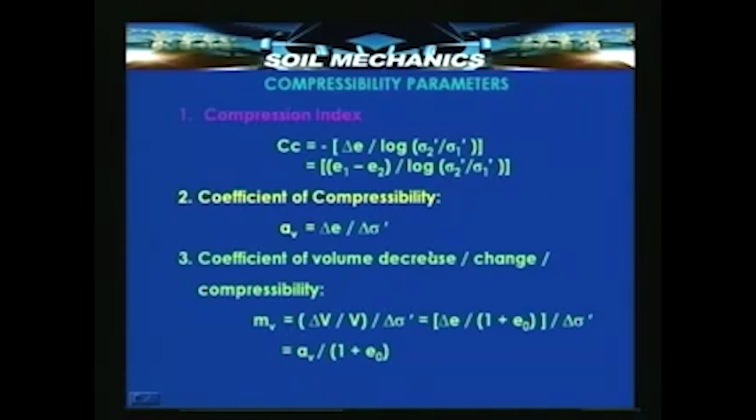What is important to notice, however, is that C c is a non-dimensional parameter and it is dependent upon void ratio change and the logarithm of the stress change, whereas a v, coefficient of compressibility, depends upon the volumetric change or the void ratio change and the stress change, effective stress in particular. And m v is nothing but a v upon the constant volume of the solids.

We know that if the total volume is 1 plus e 0, the volume of solids is 1 upon 1 plus e 0 at any point of time, where e 0 is the initial void ratio, and therefore, a v upon 1 plus e 0 is a parameter that represents compressibility in terms of the original volume of the solids, which is invariant, and therefore, it serves as a convenient denominator for comparison of different clays or different soils with different a v's or different degrees of compressibility.

Let us take a quick look at the analogy, since we are going into the mathematical representation of this analogy. We defined a cylinder with a piston and a spring with an outlet for water, and we saw that the cylinder represented the soil, the spring represented the soil skeleton, water represented the pore fluid, and the piston with its opening represented the pores, and the valve represented the degree of opening of the voids or the permeability of the soil.

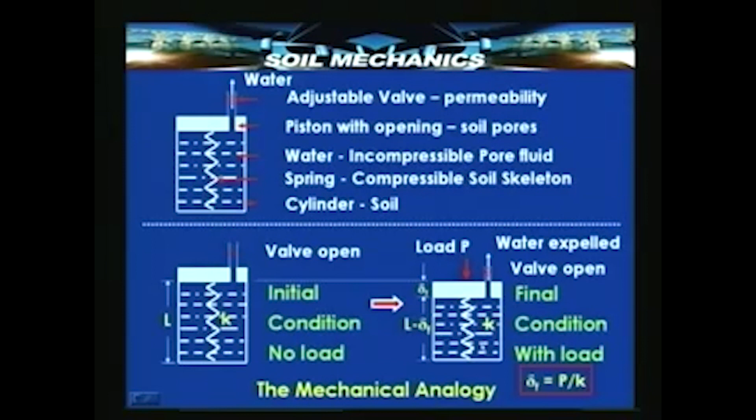Initially the soil is at rest, so there is no excess hydrostatic pressure because there is no load. The moment you apply a load at t equal to 0, the water takes the load and gradually passes it on to the solids. Ultimately, at t equal to infinity, water would have escaped to such an extent as to bring back hydrostatic equilibrium, and the spring would have compressed by an amount delta final, equal to the applied load P divided by the spring constant K.

If we take the consolidation part alone, as soon as we apply load at t equal to 0, there is no deformation of the spring. The load carried by the water is the complete load P, and the load carried by the solids is 0. But at the end of consolidation, the situation is different: the load carried by water is P minus the load carried by the spring. At t equal to infinity, K delta F becomes equal to P, so water carries no load, whereas the solids carry the entire load P.

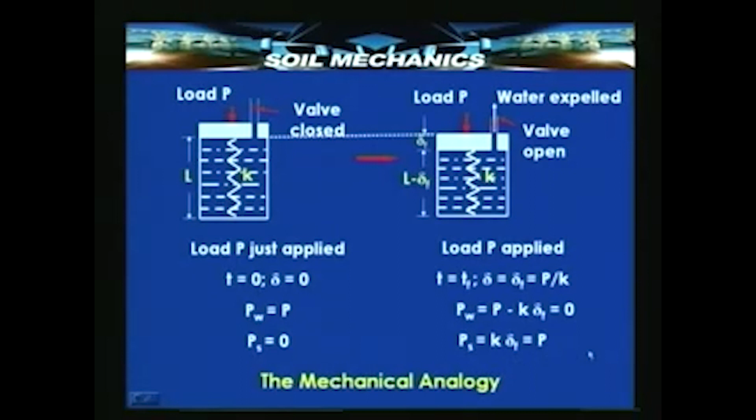Now let us see the real situation. If we apply a surcharge Q, there is an initial pore pressure U equal to Q. When you just apply the load at t equal to 0, U equals Q and sigma dash equals 0. At the end of the consolidation phenomenon, the pore pressure is U final and sigma dash is sigma F final. If we proceed further, the pore pressure gradually gets dissipated and U becomes 0, with the entire sigma dash carried by the solids in the form of Q.

This U, the so-called excess hydrostatic pressure, is a function of depth and time. This is the variation of U at any point of time. It is worth mentioning that it is 0 at the top permeable layer and also 0 at the bottom permeable layer.

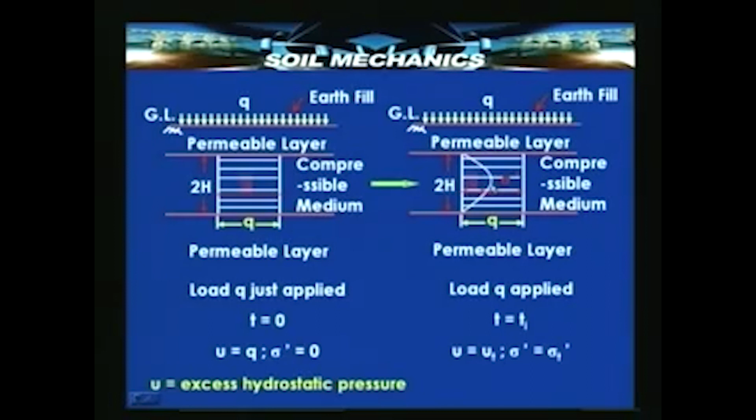Going back one slide: at t equal to 0, as soon as we apply the load, the entire applied pressure Q is carried by the water, so water takes up a pore pressure U, an excess hydrostatic pressure above hydrostatic, equal to U throughout its depth. But since the upper layer is permeable and the lower layer is also permeable, at these two points inside the clay layer the pressure is U, whereas just outside, because it is a draining layer, the pressure is 0. That means there is an infinite hydraulic gradient, so instantly the pore pressure U gets dissipated completely, and as shown in this diagram, the pore pressure is 0 at the two ends and maximum at the center, and this goes on.

The ends keep constantly having a pressure U equal to 0, whereas at the center the pore pressure is maximum, but its value keeps changing with time. Ultimately, it decreases to such an extent as to transfer the entire load to the solids in the form of sigma dash. Now let us take a look at the mathematical formulation quickly, to the extent we had introduced it last time.

We defined a number of parameters. One is Av. Av is nothing but minus dE by dP, that is, the rate of change of void ratio with pressure, how the void ratio changes as pressure is increased. Since the void ratio decreases with increase in pressure, Av is minus dE by dP.

We also defined a parameter called the degree of consolidation corresponding to any depth, in terms of E, usually expressed as a percent. This is denoted as Uz, the degree of consolidation at any depth z. It equals, at any given point of time, the initial void ratio minus the void ratio at that depth at that time, divided by the total change in void ratio.

This void ratio has to be related to pressure, and through the pressure it has to be related to the excess hydrostatic pressure, and then we can relate that to the rate at which water flows out, so that we can get the value of degree of consolidation at any point of time.

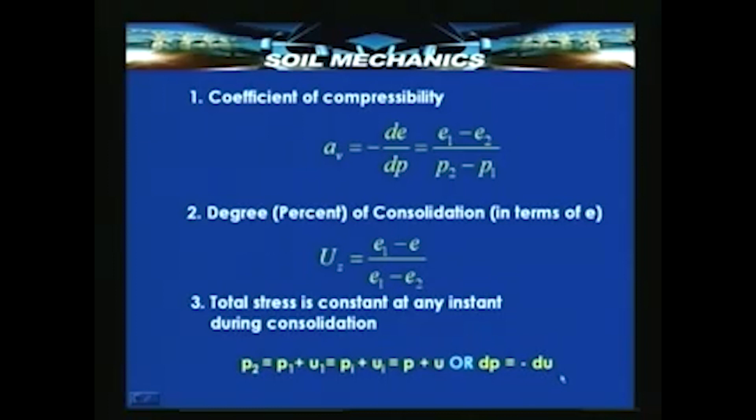So this gives us a way to express this degree of consolidation through E1 minus E, and P minus P1, and finally Ui minus U. Finally we get the degree of consolidation as 1 minus U upon Ui, where Ui is the initial excess hydrostatic pressure, and we know that the initial excess hydrostatic pressure is nothing but the external stress applied, that is, in our case, Q.

So now, if we sum up all this, we say that dE is equal to minus AV dP, and it is also equal to AV dU. So here we have the indication as to how to link the change in hydrostatic pressure, excess pressure, through the change in stress to the degree of consolidation or change in void ratio.

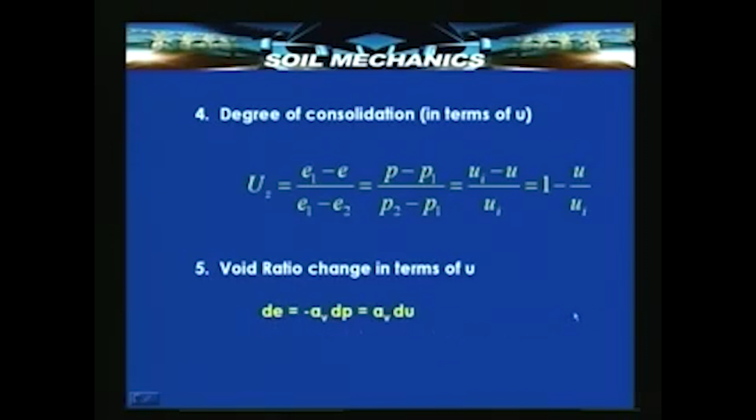For this purpose we made a series of assumptions. All the assumptions are here: homogeneous, saturated, incompressible, one dimensional compression is valid, Darcy's law is valid, and the e-p idealized linear relationship is valid.

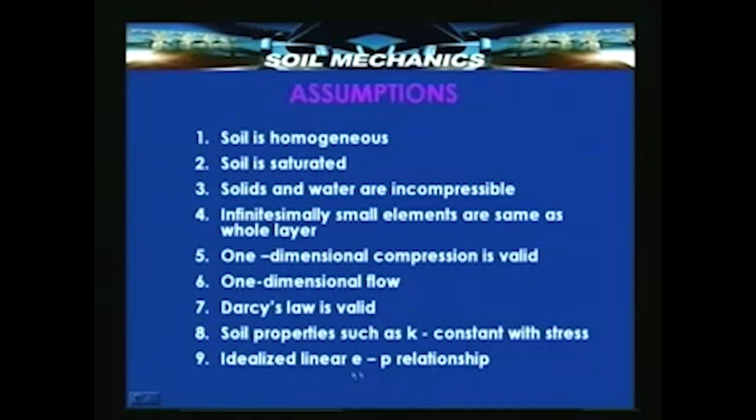So, for the purposes of mathematical formulation, we will consider a typical compressible layer with two permeable layers on either side. This is known as a double drainage system. The importance of this double drainage system will become evident after we finish the formulation of this problem in mathematical terms for two dimensional, or rather two directional, you can say double drainage system.

This earth fill is nothing but the external load applied.

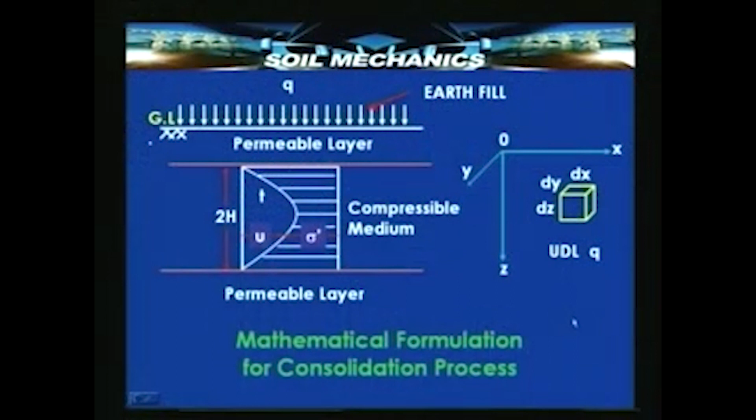We also saw last time that at the end of our mathematical analysis, we are going to have the degree of consolidation as a function of the depth and the time. For convenience, the degree of consolidation is expressed as a function of a non-dimensional depth and a non-dimensional time. The non-dimensional depth is the actual absolute depth divided by half the thickness of the layer, and the non-dimensional time is nothing but CVT by h square.

I have still not defined what is CV, and therefore at a later date we will again come back to this definition. These lines here, which show the variation of Uz with depth and time, are all similar in pattern, but as time increases you can see here that the degree of consolidation is going on increasing, or the pore pressure is going on decreasing. These are therefore nothing but lines of equal time with depth, and these are known as isochrones.

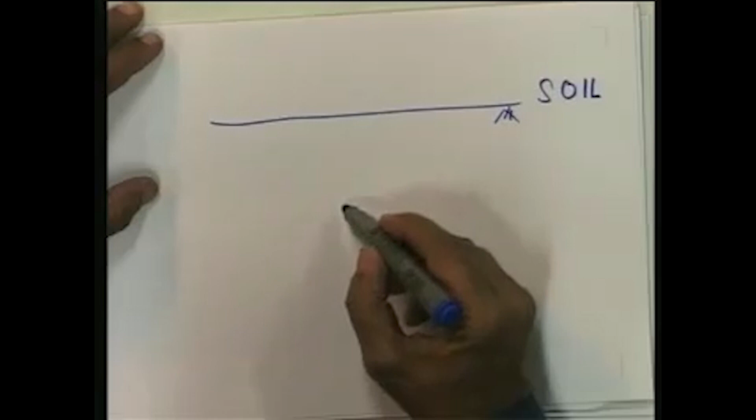Let us take a look at this slide, which shows a typical element in a homogeneous soil medium. Let me sketch it for convenience. We know we are dealing with a soil medium, and we will consider a typical element in it. Since we have assumed homogeneity, analyzing one element is as good as understanding the phenomenon over the entire medium.

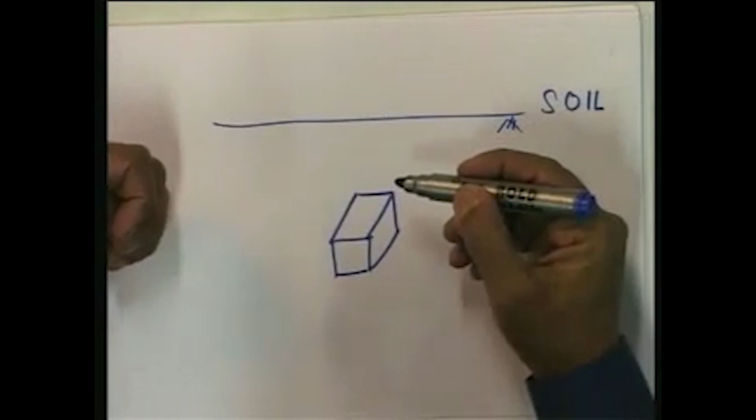Now, what is the phenomenon we are going to understand? We are interested in knowing how water is flowing out of this element. Let us use the knowledge we have of flow through this element. Suppose a certain amount of water is flowing into this element and coming out. The element is saturated.

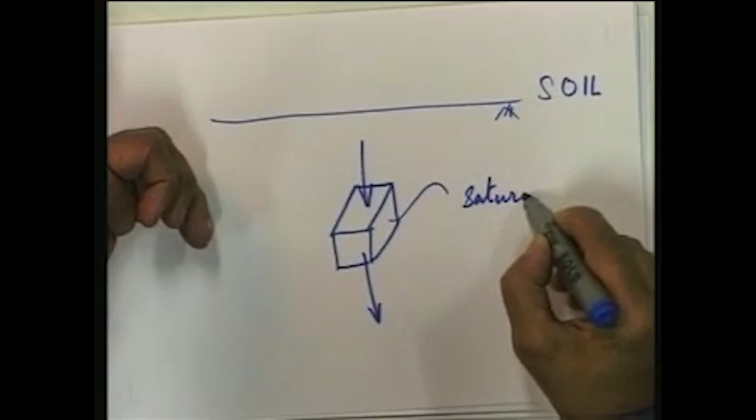Suppose this element is totally incompressible, then whatever water flows inside will also come outside. Every drop of water entering this saturated element will push out a corresponding drop, and therefore whatever flows in will also come out.

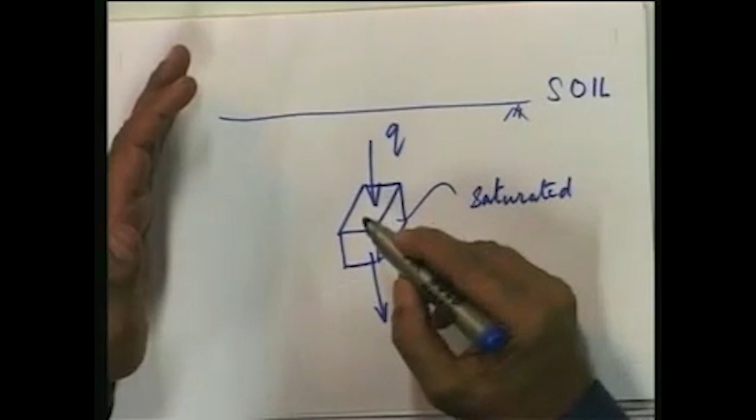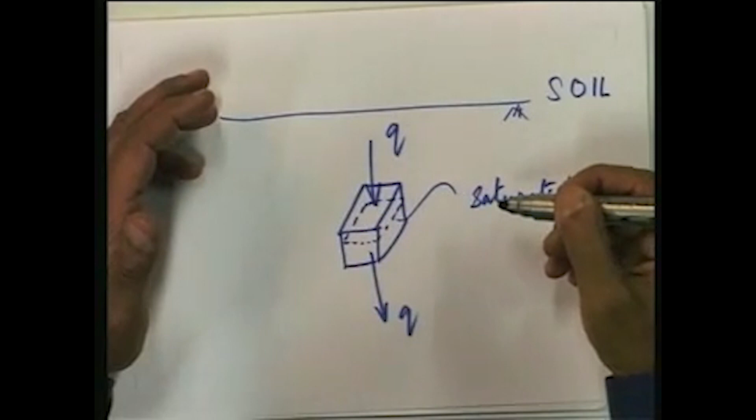But now we have a system where the soil is saturated, but as the water flows out, the soil compresses. The element compresses, which means its volume decreases. As Q goes out, there is a small reduction in the volume of water, and therefore there is a difference in the quantity of flow between outflow and inflow. In the problem of consolidation, it is this net outflow that we are interested in.

We can obtain this by simple basic considerations. Suppose there is an inflow represented as Vz, where Vz is the velocity. Velocity is nothing but flow per unit time, and considering unit area, Vz is flow per unit area per unit time. If the area is of finite dimensions delta x delta y, as shown here, with x, y, z axes also shown...

Then the inflow and outflow will be different in this medium. Let us represent the inflow as Vz, that is flow per unit area per unit time, and the outflow as Vz plus an incremental flow, that is the rate of change of flow multiplied by the depth over which the flow takes place: Vz plus del Vz by del z into delta z.

However, we know that this rate of outflow of the element is going to be equivalent to the rate of compression that ultimately takes place. So let us see what this rate of outflow is, so that we can express it in terms of this volume and relate it to the volumetric changes.

The net outflow from the element per unit time would obviously be this minus this. So del Vz by del z into delta z gives us the net outflow per unit time per unit area. If I multiply this by the area delta x delta y, I get the outflow over the whole element, but still per unit time, and this is nothing but the rate of outflow from the element.

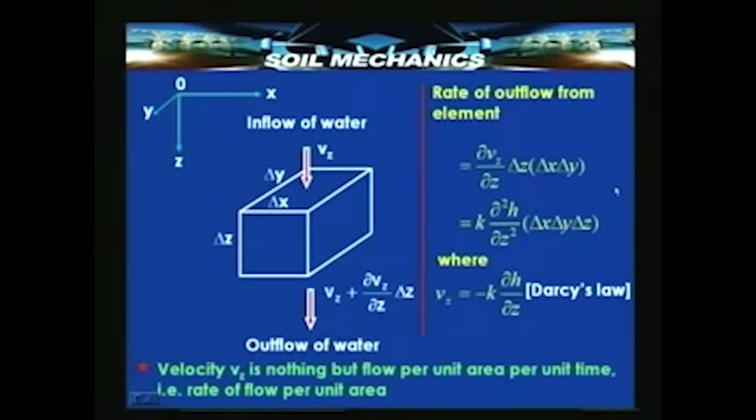Now, what this means is we can represent ultimately the rate of outflow in terms of the permeability of the soil, in terms of the rate of change of hydraulic gradient, and in terms of the volume. It is a very interesting equation which completely captures the physical phenomenon that in the soil the rate of outflow of water is related very closely to the coefficient of permeability, and that is what is causing the entire phenomenon of consolidation in clays. Then we know that flow of water depends upon the rate of change of gradient, and that is also captured here, and the quantity of flow obviously depends upon the volume of the element, and therefore, that is also entering into this equation. Now, this rate of outflow must be equal to the rate at which compression takes place.

Let us see. At any instant during the consolidation phenomenon, if the void ratio happens to be E, then the volume of the voids in the soil would be E upon 1 plus E, because volume of the solid skeleton remains constant and 1 plus E is the total volume, and therefore, volume of the voids is E upon 1 plus E. And if I take the entire soil element of dimensions delta x, delta y, delta z, then the volume of voids in the element at any point of time to begin with will be E upon 1 plus E times delta x, delta y, delta z.

Now, as the flow takes place from inside the element to outside, this volume decreases. So, the volumetric change in unit time, that is the rate of change of volume, which is nothing but the rate at which the compression takes place, is going to be the derivative of this volume of voids with respect to time, and that is what is the rate of change of voids.

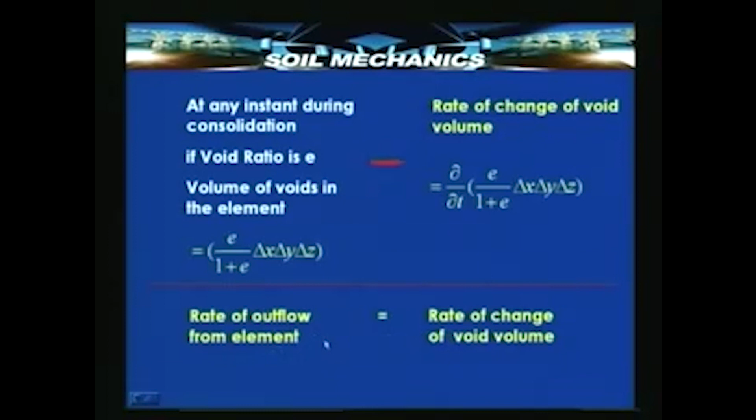Since this must be equal to the rate at which outflow is taking place, let us equate this, and we then have k del 2 h by del z square into delta x delta y delta z is equal to all this, which means that if we cancel out the volume of the element, which obviously is not 0, because we are dealing with a finite size dimension of the element, the volume of the element is not 0. If the volume of the element were 0, there would have been no problem to discuss at all. Therefore, in this case, this can be cancelled out, and we will have k del 2 h by del z square is del by del t of E upon 1 plus E.

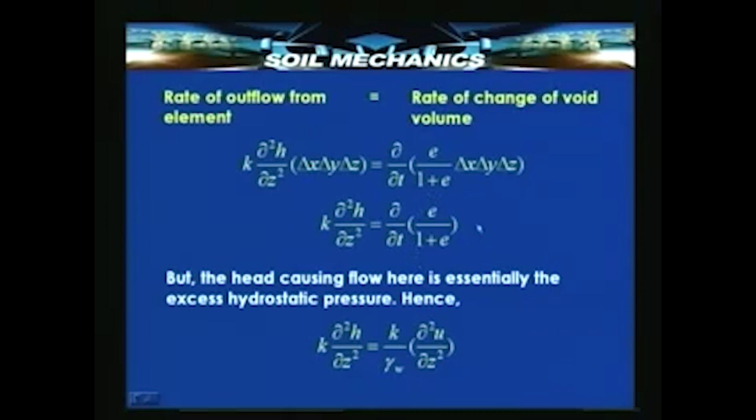Now, this h, which is the head causing flow, is nothing but u upon gamma w, where u is the excess hydrostatic pressure. So, this del 2 h by del z square can be written in terms of u upon gamma w, and so we will have k upon gamma w del 2 u by del z square, where u now is the excess hydrostatic pressure. This must now be equal to del by del t of E upon 1 plus E. So, let us equate them.

If you equate this is what you get, but before equating, let us see what this del by del t of E upon 1 plus E is. We have just now stated that 1 upon 1 plus E is the unchanging constant volume of the solids. So, volume of the solids is 1 upon 1 plus E, which remains constant, and therefore, del by del t of E upon 1 plus E is nothing but 1 upon 1 plus E of del E by del t. This being constant can be taken out.

And we have already seen that d E is related to d u, and from the previous equation, we can equate this change in void ratio with k delta 2 u by delta z square.

That is, if we equate the rate of flow with the rate of void compression and transfer the terms containing u to the two sides of the equation, then this is what we get. In this, k, a, v are all soil parameters, constants, and so this whole left hand side can be written as C v del 2 u by del z square equal to the right hand side, which is del u by del t.

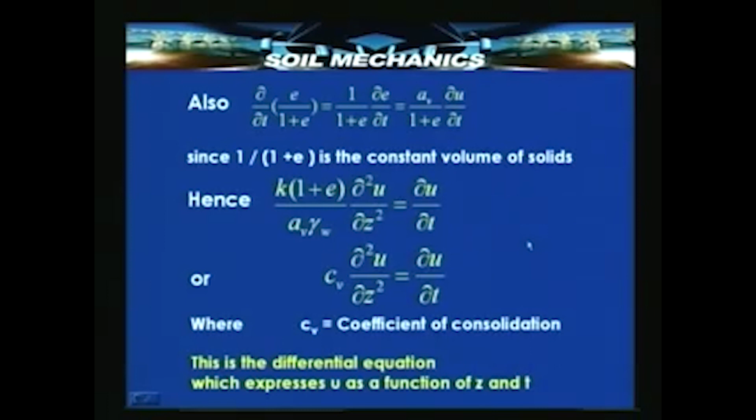We have now defined a new parameter Cv, the coefficient of consolidation. This gives us the differential equation which expresses u as a function of z and t. This is what we were after, since we wanted to know the rate of change of u with time so we could predict the compression corresponding to any time t. This coefficient of consolidation is yet another parameter, making the total number of compressibility parameters we have defined so far equal to 4.

Let us take a quick look at these 4 parameters. The first is minus dE by d log P. It has no units, because void ratio has no units, and log of the ratio of pressures also has no unit. Av, which is a linear relationship between E and P, will have units of inverse of stress, since E has no unit and 1 upon dP will have units of inverse stress, that is centimeter square per kg or meter square by kilonewton.

Another parameter we had defined was Av divided by the total volume 1 plus E, or in other words Av multiplied by the constant volume of the solids. This obviously will have the same units as Av, that is meter square per kN, because 1 plus E has no units.

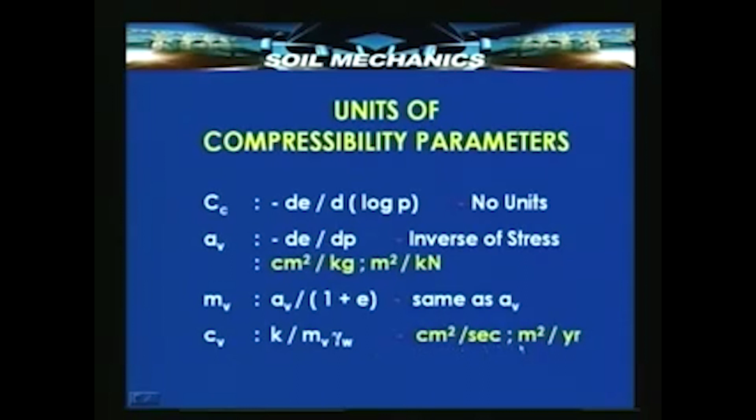Now the last parameter Cv, which we have just defined, is K upon mv gamma w. Since K has units of centimeter per second, mv has units of meter square per kilonewton, and gamma w has units of kilonewton per meter cube, effectively we get units of centimeter square per second or meter square per year.

Now we have come to a stage where we have the governing equation for this phenomenon of consolidation. This equation, Cv del squared u by del z squared equal to del u by del t, is the equation which controls and clearly depicts the phenomenon of consolidation. In fact, it is seen that this in general represents any process where diffusion is the major phenomenon, so this equation is also often known as the diffusion equation.

This equation has to be solved. If solved, we will get an expression for u in terms of z and t. What is important to notice is that on the left hand side we have the rate of change of pore pressure, the hydrostatic excess pressure, as a function of z, and on the right hand side we have its rate of change with respect to time. So if we solve this, u as a function of both z and t can be obtained.

Then what is the best way to solve this? The best way would be to assume the solution as a product of a function of only z and a function of only time. This is known as the principle of separation of variables in the theory of differential equations. Suppose we express the excess hydrostatic pressure as a product of two independent functions, one a function of only z, another a function of only t, then there are certain advantages in solving them.

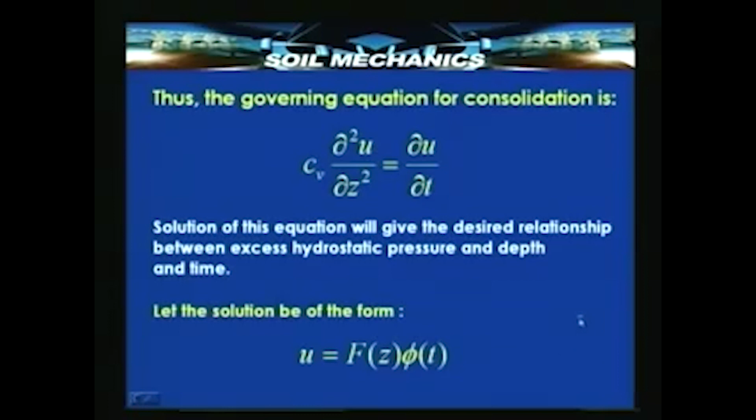Since we have already written the differential equation Cv del squared u by del z squared equal to del u by del t, and we have defined u as f(z) phi(t), let us substitute this value of u by suitable differentiation in the consolidation equation. That means del squared u by del z squared is required, so differentiate f(z) phi(t) with respect to z. Since when you differentiate u with respect to z, phi(t) remains constant, we get Cv phi(t) f double prime(z), which is the second derivative of u with respect to z. On the right hand side, since we have del u upon del t, when you differentiate with respect to time, the function f(z) remains constant.

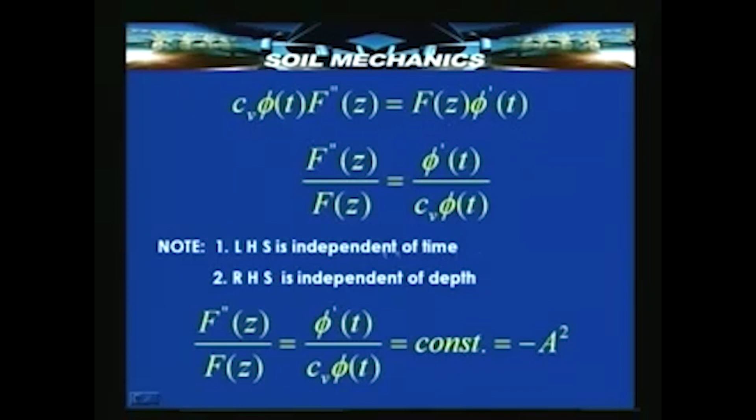So we have f(z) into phi dash t, where phi dash is the first derivative of phi with respect to time. We can completely separate the two variables z and t by bringing this here and this here, so that we will have an equality of this kind.

Now let us take a look at this equality. It suggests that on the left hand side we have no time parameter, and on the right hand side we have no depth parameter. That means the left hand side is completely independent of time and the right hand side is completely independent of depth, and that is only possible if this ratio is equal to some constant. One is a function of z, the other is a function of time, and they are equal, and that is only possible if the ratio is a constant.

Let us represent this constant as minus a square. The reason why we are representing it as a square and as a negative quantity will become evident. It is for getting an elegant equation which can be solved comfortably.

If we take the ratio as constant, equal to minus a square, then we get an equation like this, which is elegant and convenient, consisting of the derivatives of the function in terms of z. We also get another part where phi dash t is minus a square C v phi t. So we have one equation consisting of the derivatives of z only, and another equation consisting of the derivatives of only the function of time, phi.

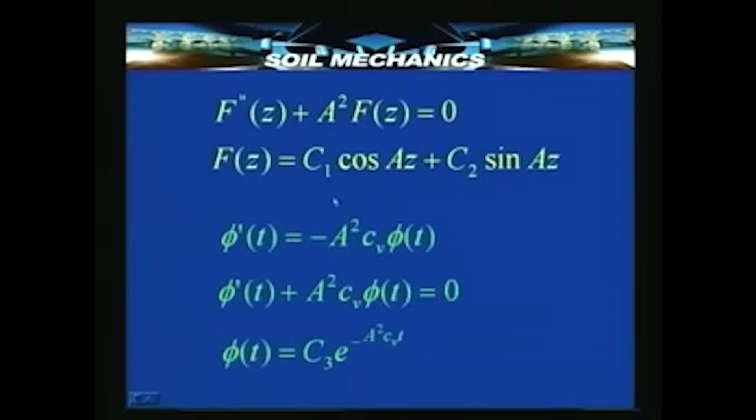So now we have two solutions, one in terms of z and another in terms of t, and these contain constants C1, C2 and C3. Since the expression for u is f(z) phi(t), u will now obviously be the product of these two. So u will be equal to C1 cos(az) plus C2 sin(az), multiplied by C3 e to the power minus a square C v t. In this, there are two constants inside the bracket and one outside, and in addition there is that constant a which we had introduced right in the beginning.

If we unify these by expanding the bracket, we get C4 cos(az) plus C5 sin(az), into e to the power of minus a square C v t, for the excess hydrostatic pressure u. This means that in order to compute u, we should be able to determine the constants C4, C5, and a. Although they were originally 4 constants, effectively now we have brought it down to 3 constants.

Now these 3 constants, C4, C5 and a, have to be determined, and in order to determine 3 constants we need 3 conditions. Since this is a problem in which the parameter to be determined, u, is a function of depth as well as time, we need a boundary condition related to the depth, as well as the so-called initial conditions related to the time factor t. So we need in all 3 conditions, some relating to depth and some relating to time t.

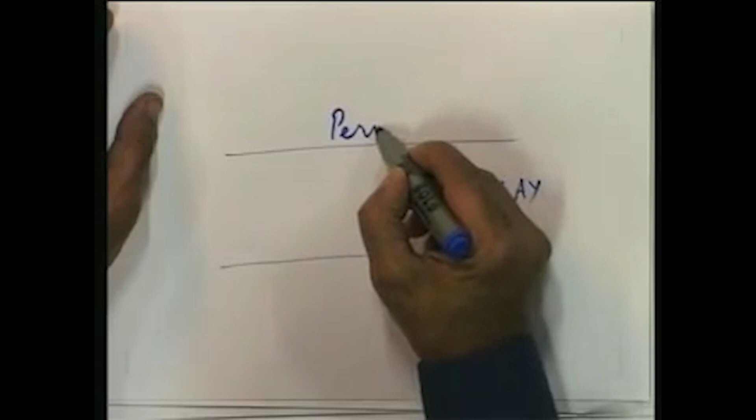Let us take this clay layer and our already existing knowledge of pore pressure variations. This is our clay layer. On top we have a permeable layer, at bottom we have a permeable layer, and because of this it is known as the double drainage case.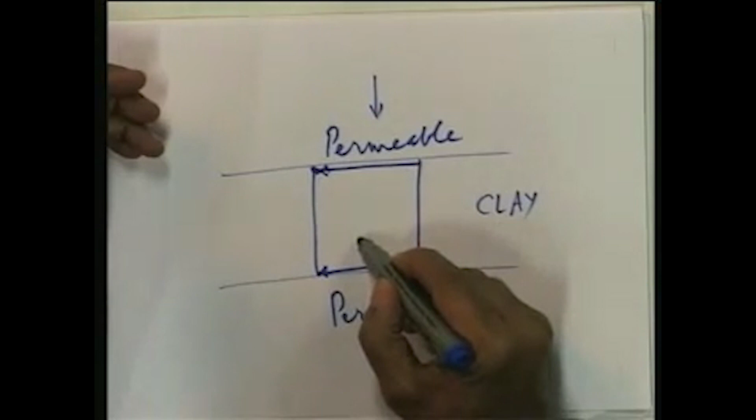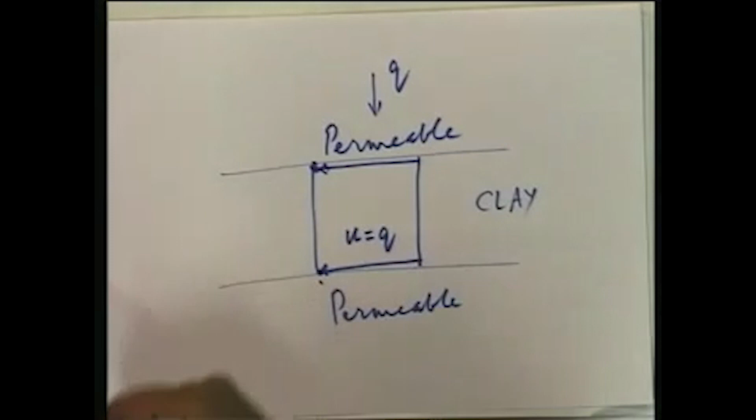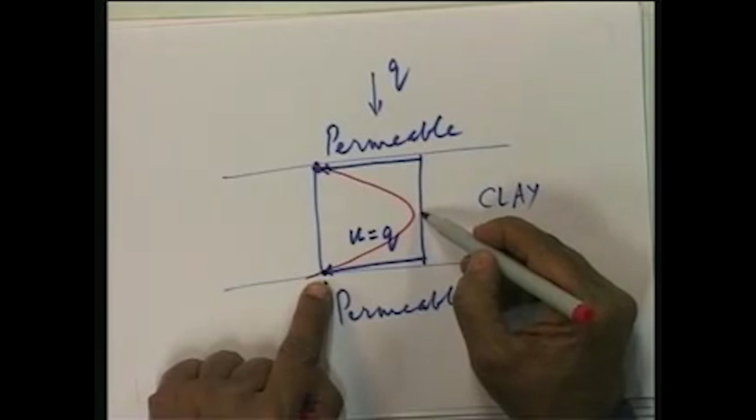What happens is, because of this, when we apply load, although initially the pore pressure from top to bottom is equal to U equal to the applied load Q, at the very next instant at the boundaries, because pressure is U or equal to Q on the inner side of the boundary and is equal to atmospheric or 0 on the outer side of the boundary, the pressure U immediately gets dissipated, it becomes 0 here. This means that the pressure distribution, as we already have seen, becomes somewhat like this: it is 0 here, and some pressure has already got dissipated at the center, so it has reduced a little bit from the initial value. However, it is still the maximum at the center of the clay layer.

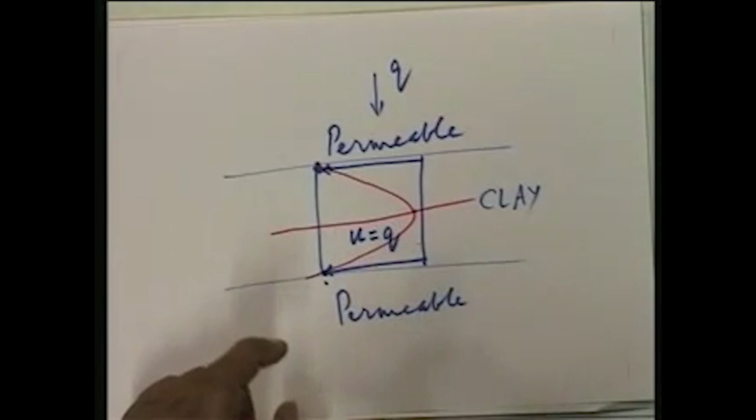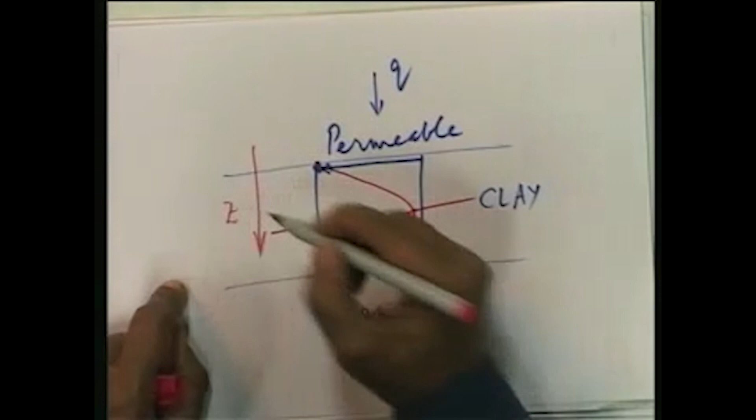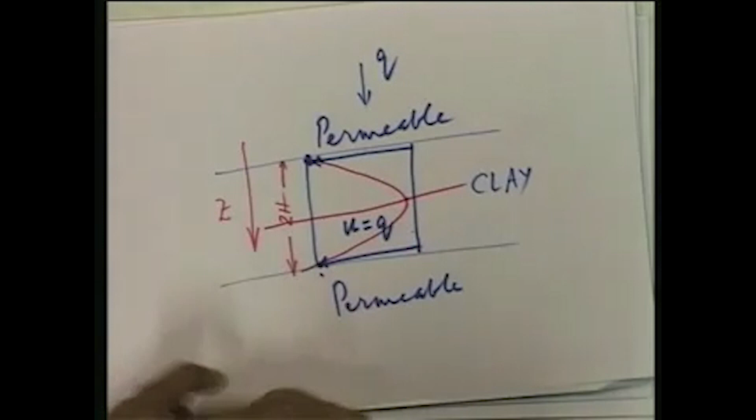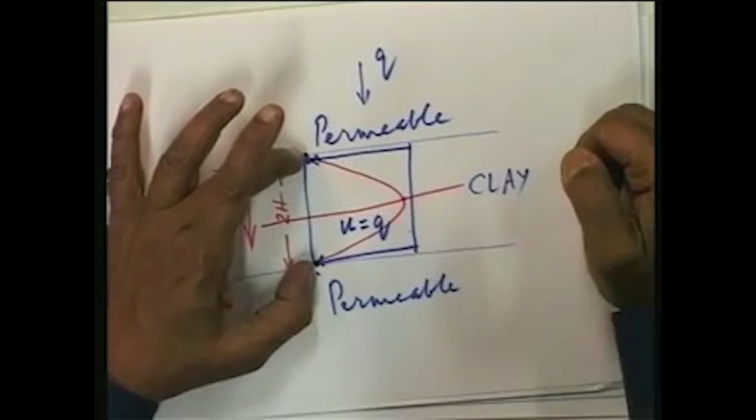So, we can from here state or stipulate the boundary conditions like this. If z is the coordinate which describes the depth, then at z equal to 0 and at z equal to 2h, where 2h is the depth of the clay layer, we know that this pressure U, the excess hydrostatic pressure, must be 0, and not only at the initial instant, but once the pressure has got dissipated, it will continue to be 0 at all times until the entire process is completed. So, we can say at z equal to 0 and at z equal to 2h, U, the excess hydrostatic pressure, is 0 at all times for t greater than 0,

except at the very first initial instant, where as soon as the load is applied, the excess pore pressure is just equal to the applied pressure Q. So, now we already have two conditions, and possibly we can determine 2 out of these 3 constants. One other condition that we need is an initial condition, because since 2 of these are boundary conditions related to z, we must now look for a condition which tells us how the excess hydrostatic pressure varies with time, and that also can be easily stipulated.

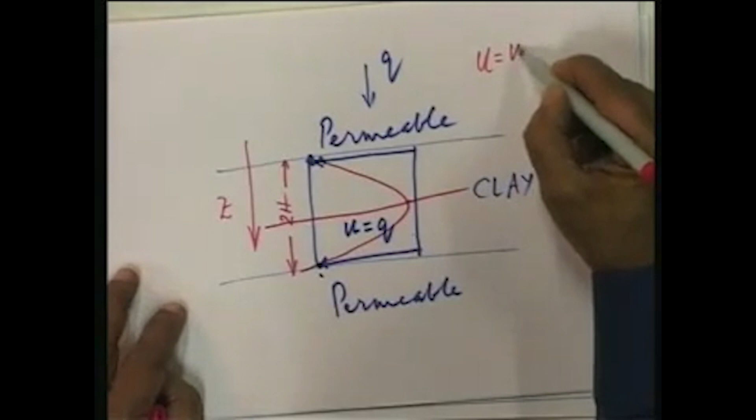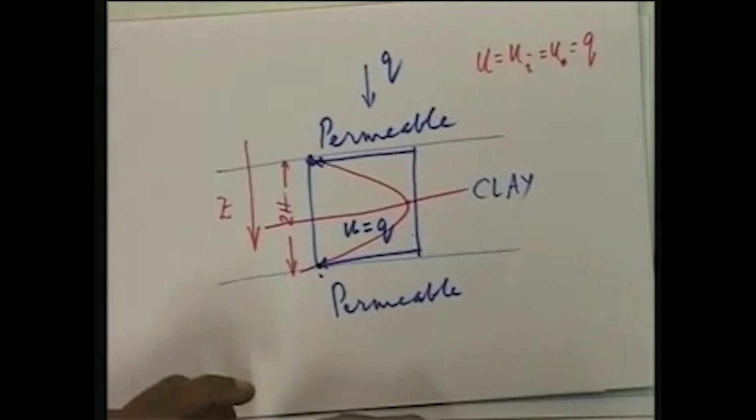When t is equal to 0, U, the excess hydrostatic pressure, will have some initial value. This initial value may be called U initial, or some fixed value U0, or in any case it will always be equal to the applied stress Q. So, at t equal to 0, U is equal to the initial excess hydrostatic pressure, whatever be the value, and this is valid throughout the depth of the clay layer. At t equal to 0, throughout the depth of the clay layer, we will find that U is equal to a fixed value equal to Q, that is, uniformly distributed. So, that is another condition which we can advantageously use in order to determine the constants.

So, if we apply these boundary conditions, what will happen is we will get an expression for U. Let us go back for a moment. This is the equation in which we want to determine the constants. Since we know the values of z, or the value of U at certain values of z and at certain time t, what we can do is substitute these values of z or this value of t here and write down the expression for u.

And if we do that, then successively by substituting these conditions one by one, first this condition, then second and then this third condition, we will be able to get a series of equations which can then be solved, and we can evaluate the constants and substitute them back in the expression for u, so that we get this expression which represents ultimately the variation of u with respect to depth and time.

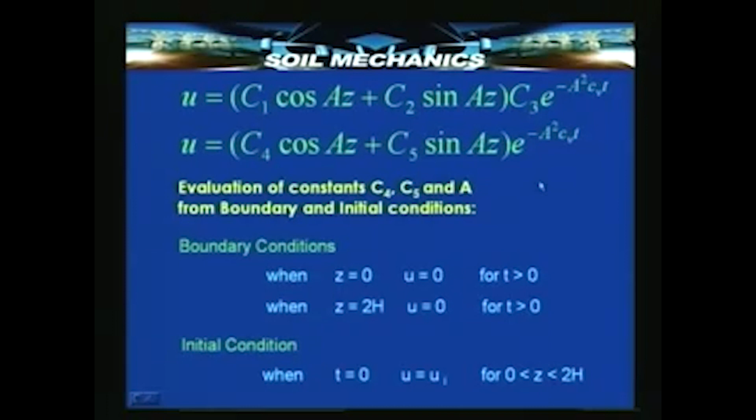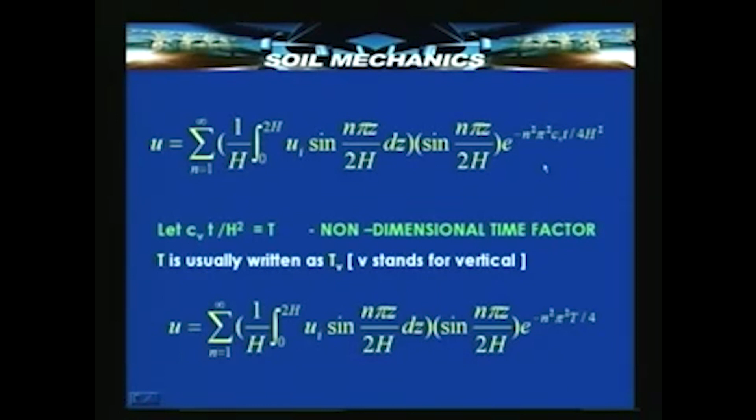Here we find that in the summation sign there is a value of n which varies from 1 to infinity. The reason why we have brought this summation sign is the solution to this equation is in terms of sine and cosine, and when we substitute the boundary conditions, we found that the constant A works out to something which can be expressed in terms of pi, n pi to be precise. Then this equation is valid for all values of n, and therefore, there is one solution for u corresponding to each value of n, which means that the final real solution is the sum of all these solutions corresponding to all the values of n which are possible. The values of n that are possible are only 1 to infinity, and therefore, integer values which are possible for n are only 1 to infinity, and that is why we have infinite number of solutions, n equal to 1 to infinity, and this entire factor within that summation sign will finally give the real value of u taking into account all possible solutions.

Continuing further, we found that we can further simplify or further rewrite this expression for u in terms of another parameter capital M, which depends upon a parameter small m, which is related to capital M as capital M is equal to 2m plus 1 into pi by 2. That is, when we go into the details of the consolidation equation, we will find that we have this parameter n, small n, which could be even or odd, and then we will find that values corresponding to even values of n do not exist or they vanish, and finally, the solution really contains only the terms corresponding to odd values of n, which from a general point of view can always be expressed as 2m plus 1, and that is how where we had n pi upon 2, since only odd terms are to be considered, now we have 2m plus 1 pi by 2, and this is for convenience represented as capital M.

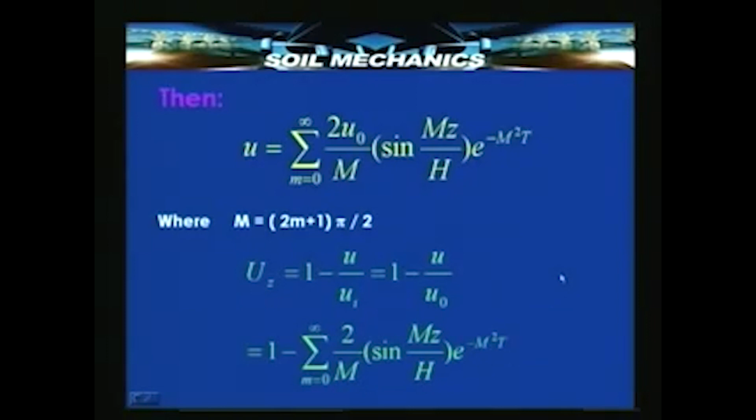This expression can be graphically represented in the form of isochrones, as shown here. In that expression for Uz, we had the non-dimensional depth z by h and the non-dimensional time factor Tv. Suppose we substitute different values of T equal to 0, 0.05, 0.1, and so on up to 0.9, then we find that at different values of z by h we get different Uz values, and this is how the Uz values will vary. These are known as isochrones, meaning these are the values of Uz corresponding to constant time or constant time factor.

Here we have a line, for example, corresponding to T equal to 0.05. That means at this depth, say a depth corresponding to a non-dimensional value z upon h equal to 0.1, there is, at time T equal to 0.05, a certain Uz value, let us say this. Then at the same time at another depth we have Uz equal to 0. So the Uz values vary with depth, and at a particular time T, this will be the nature of distribution of Uz with depth.

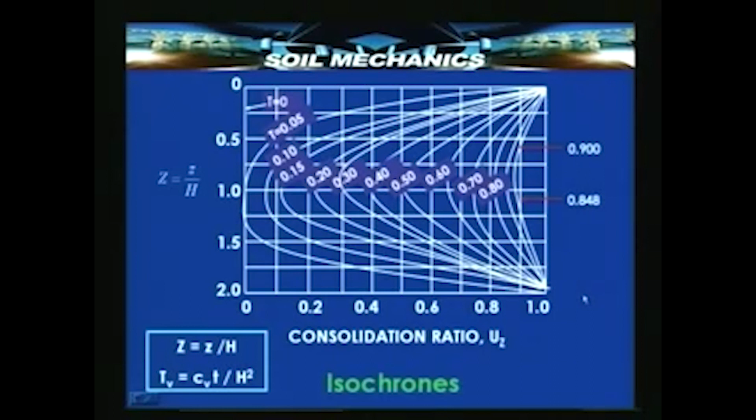There are two particular values of time which are important, the reason for which we will see a little later. The two values of capital T which are important from a practical point of view are T corresponding to 0.5 and T corresponding to 0.9. The reason is that corresponding to 0.9 degree of consolidation, the time factor is known to be 0.848, and similarly corresponding to Uz equal to 50%, we have a corresponding time factor known as T50. We can use this in the computation of the degree of consolidation corresponding to any time, as we will see a little later.

Now there is one more parameter of importance. We have been able to determine the degree of consolidation as a function of depth, but in any given practical situation, rather than looking for the degree of consolidation at any particular depth, we would like to know the average degree of consolidation over the entire depth of the clay layer. Since we know what Uz is, it is possible to determine the average U by integrating it over the entire depth and averaging it over the depth 2h.

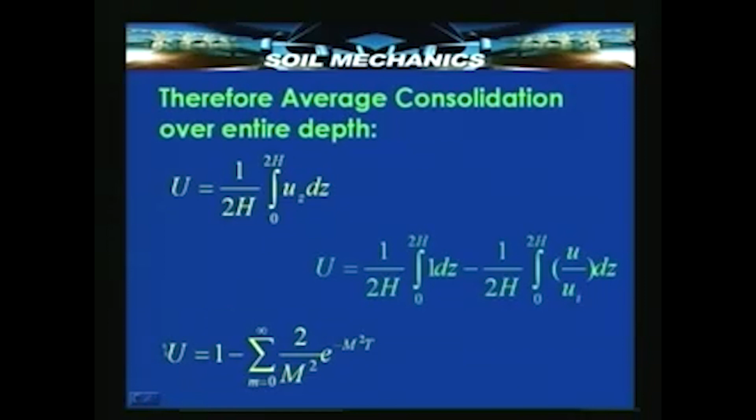This can be done step by step to get the final expression. If you take this final expression for the average degree of consolidation and relate it to capital T, and see its variation, you will find that the average consolidation varies with time factor Tv in such a way that it becomes maximum, 100%, at T equal to infinity.

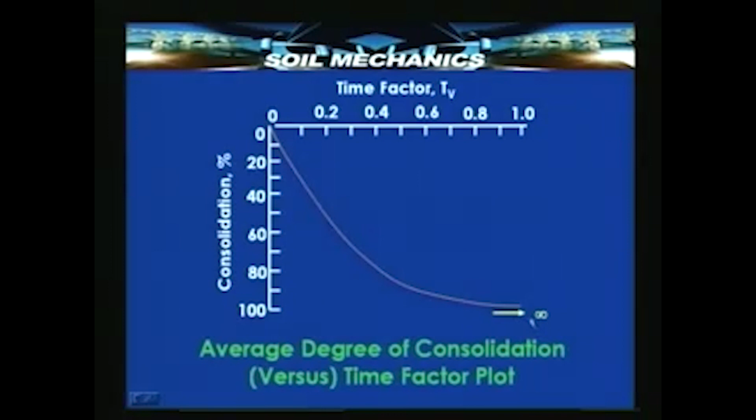So in today's lecture we have seen the details of the derivation of an expression for u, which is nothing but the mathematical treatment of the phenomenon of one-dimensional consolidation. In the next lecture, we will develop further understanding of the physical nature of this mathematical expression we have derived. Then we will go into the details of determining the coefficient of consolidation Cv, which is important for determining the time factor, the pore pressure, and the degree of consolidation, not to speak of the average degree of consolidation. We will reinforce all these concepts with the help of a few examples. Thank you.